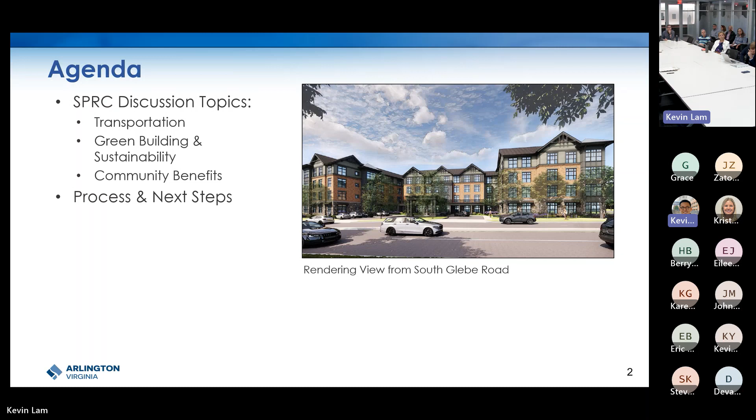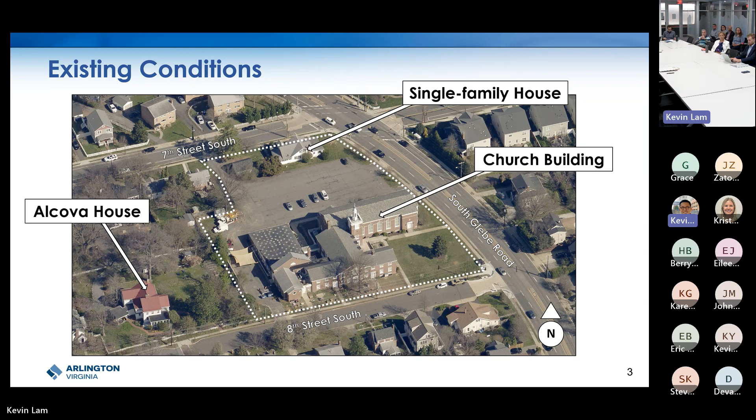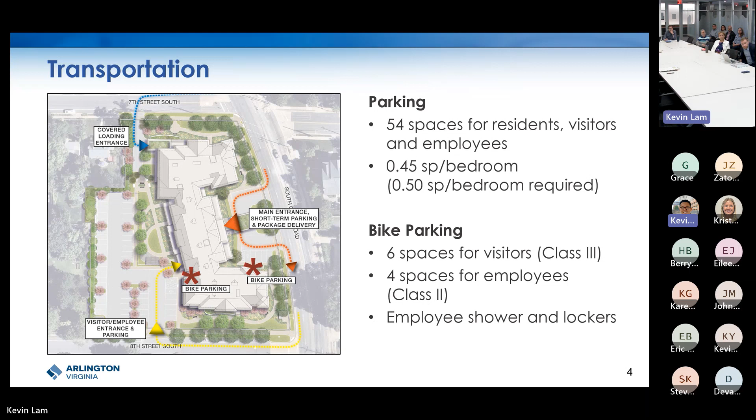In terms of parking, the applicant will be providing 54 spaces, serving residents, visitors, and employees. This works out to a parking ratio of 0.45 spaces per bedroom, and the applicant is requesting a reduced parking ratio since the zoning ordinance requirement is 0.5 spaces per bedroom. In terms of bike parking, the applicant is providing 6 spaces for visitors in the form of a bike rack by the front, and 4 spaces in covered bike racks for employees in the rear. The facility will also include an employee shower facility as well as lockers.

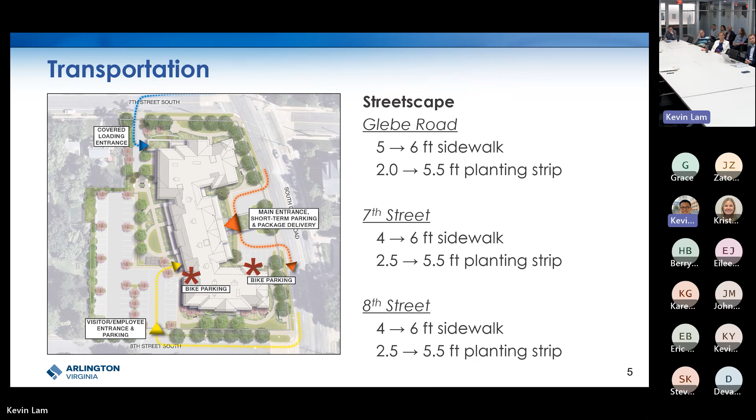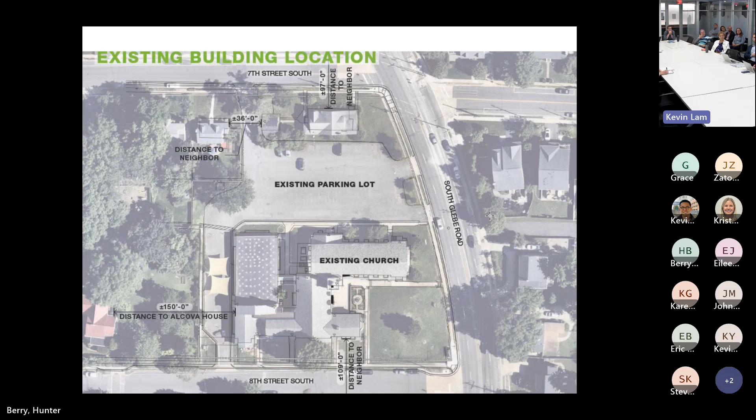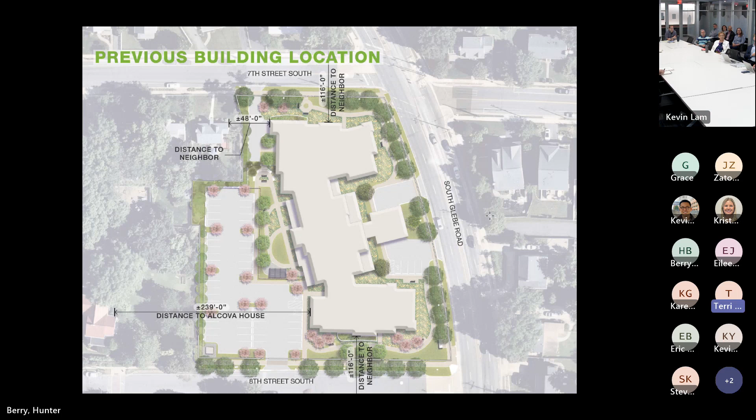Here we have what was our former siting of the building on the site, and this is our update. It's going to be hard to tell unless you come look at my screen, but we shifted the building 7 feet to the east, closer to Glebe Road. This was done in response to requests from staff, and it allows the building to better hold the street line with Glebe Road for a more urban condition.

By doing that, we were able to move our building further away from our neighbors. We were also able to shrink the front drop-off area to reduce some of the asphalt there. And again, per staff request, we took a detailed look at the porte cochere and shrunk the design to make it more urban and less suburban looking and feeling, which we'll have more images of later.

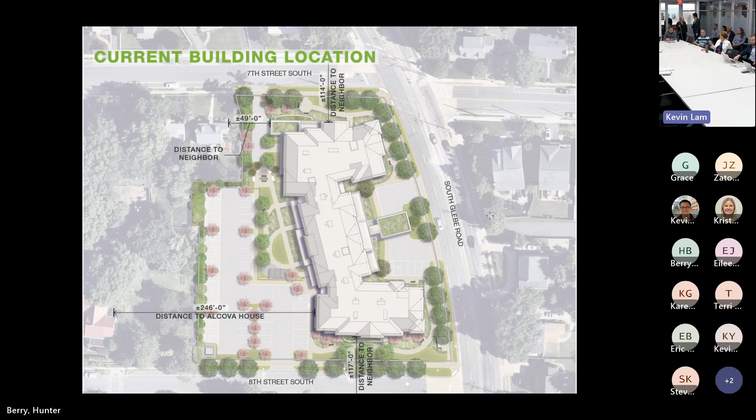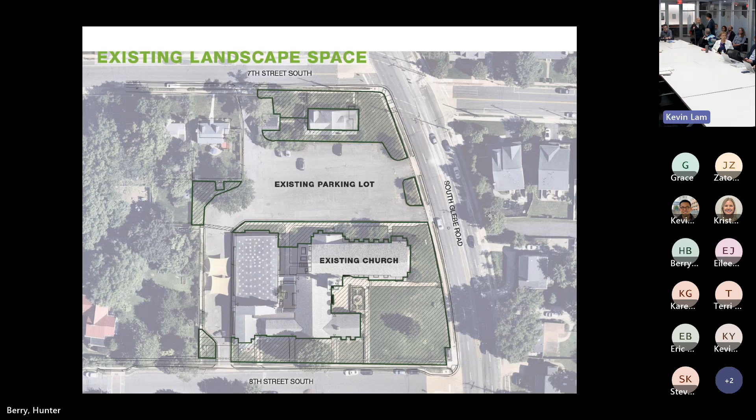First, we've shifted the building, as I mentioned, 7 feet to the east. This allowed us to introduce even further biophilic and native plantings to the site. It also allowed us to increase the rear courtyard—the SPRC had requested we look at expanding it—so now that space has grown by over 800 square feet.

We're also able to, by shifting the building, introduce further planting strips within the parking lot, so now we have an additional row of trees there. We're actually able to further expand the landscaping on the western edge of the property that fronts our neighbors, including the Alcova House. We were able to add, per SPRC request, two areas of green roof, on the porte cochere and on the loading dock in the rear.

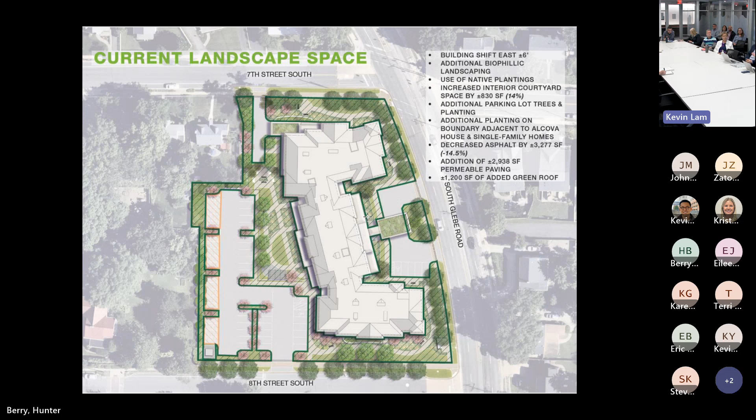Finally, we were able to further decrease asphalt by over 3,000 square feet, in two ways. One, by shifting the building east, we shrank the driveway in front very slightly. The other was introducing permeable pavers, which I'd like to get into more detail on in a second.

This is that same landscape plan without the hatching. I wanted to show how green and vibrant the landscaping on site is going to be, and I also want to point out the permeable pavers—an important thing to note. It was a request from SPRC; we took it back and studied it diligently. The challenge is there are a lot of conflicts because of utilities running through the site where you can't have permeable pavers. What we found is this entire strip of parking on the west side, we are able to have permeable pavers. So we went from having none before to 3,000 square feet of pavers moving forward, which we're thrilled about.

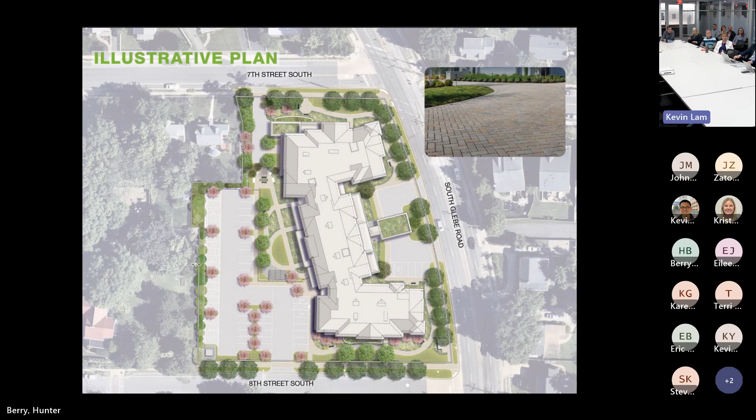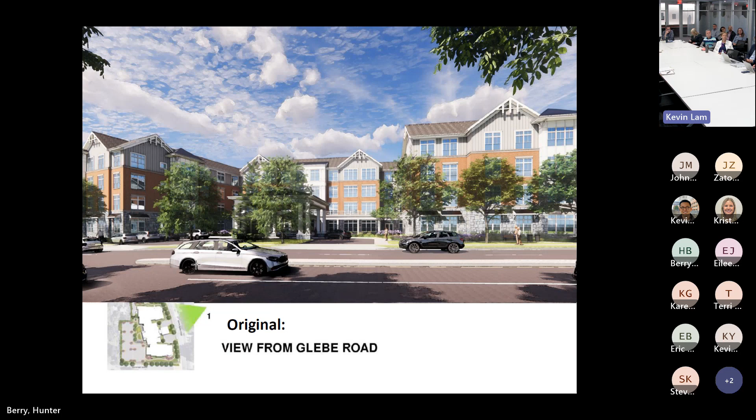So moving on to some of the architectural views of the site. This is the original view, the view we showed last time at SPRC from Glebe Road.

And this is our new view today. The first thing I'll point out is the porte cochere, as I mentioned. We worked to shrink the overall size of this. We also flattened the roof, and that allowed us to have the green roof there.

We also made a number of updates to the design, driven by two factors: one, to be more reflective of the neighborhood design, and also the arts and crafts style. So we worked with the color palette to introduce a richer color palette that we think is more reflective of the neighborhood. In addition, at the top here, we had vertical siding before, and now we've introduced architectural shingles.

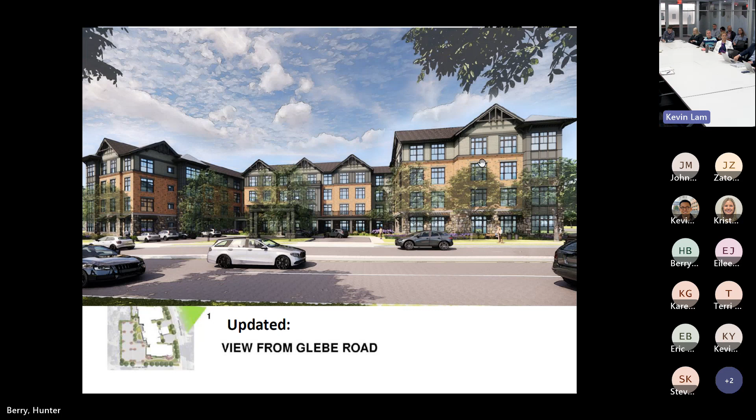This is the view of 7th and Glebe. This was the previous view, and this is our new view today. So just a couple things to point out. First, hopefully you felt the presence a little bit - we're definitely holding that street wall more, which we think is a really nice feature. In addition, we've upgraded the stone at the base of the building to be more reflective of what we've found in the actual neighborhood.

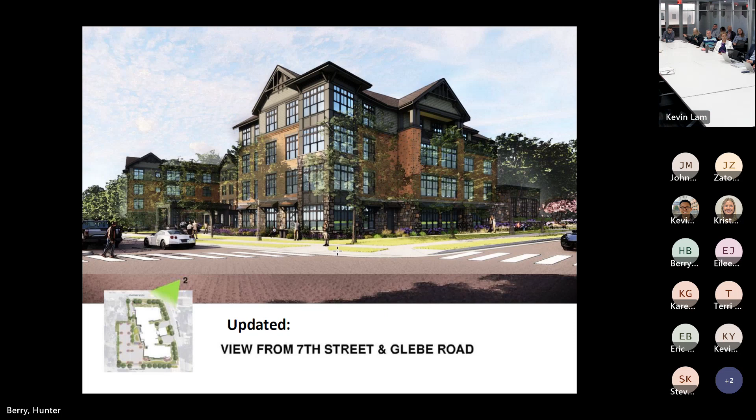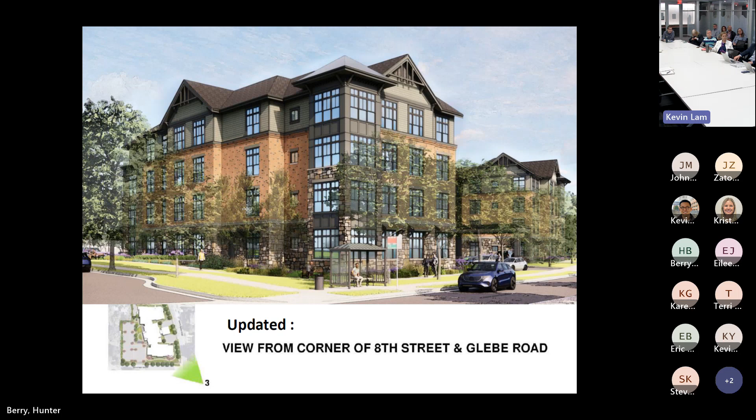Here's a view from 8th and Glebe, and here's our updated view. A couple things to point out: before we had a monolithic brick design, and now we have a blended brick design that we think is a much nicer feature. In addition, per a request from SPRC, where available, we've shrunk windows. This is a good opportunity to show you on the left side here - you can see some of the windows. We've been able to reduce the size as we have in other places. It's just a good example.

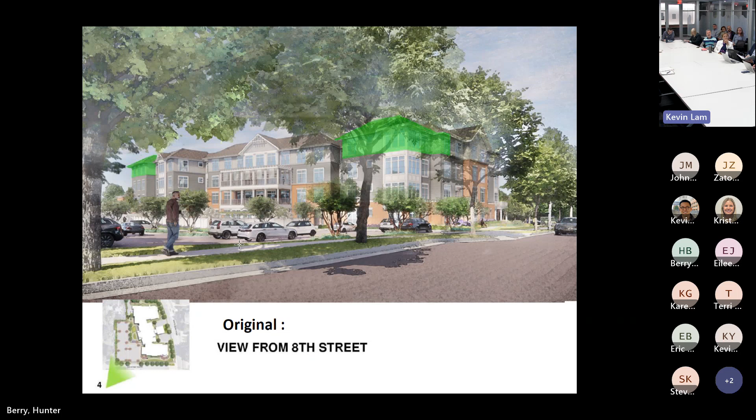And then finally, the view of the rear of the building. We showed this at the last SPRC. We said we were committed to further reducing the massing in the rear closest to our residential neighbors - that's highlighted in green. And here's that new view today. I think the easiest place to see it is on the left side here - this is the north wing, we've reduced the massing there. It's a little tougher to see here because of the tree, but the massing has also been reduced on this corner of the building as well.

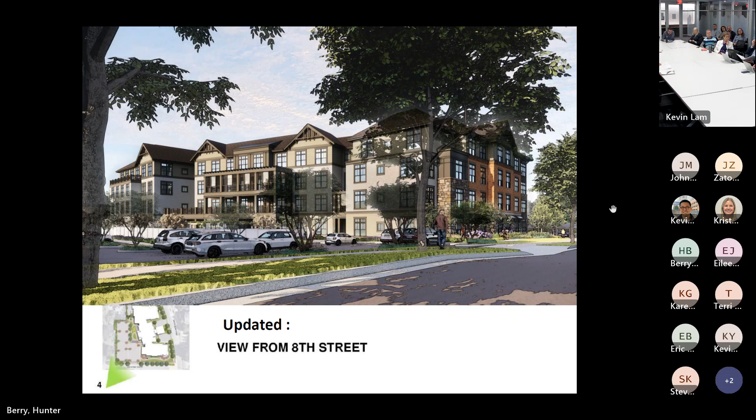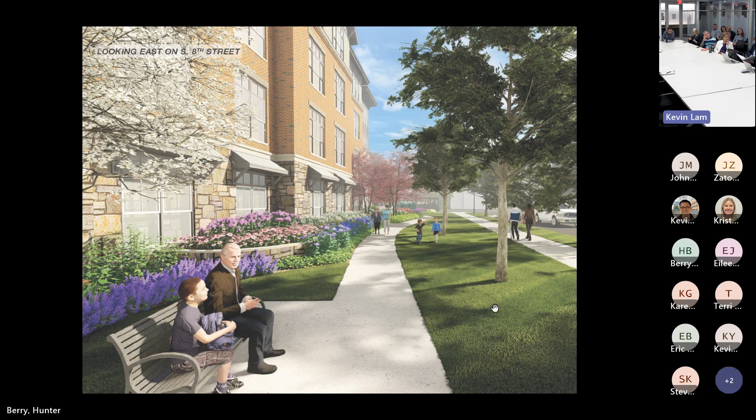And finally, we had a number of questions about landscaping, how it's really going to look and feel on the site. So we have a number of images around the site I'd love to share with everyone. This is if you're standing on 8th Street looking east towards Glebe Road, just highlighting the absolute beautiful landscaping all along the building, lots of green area, and on this side of the project, street trees both outbound and inbound to the sidewalk.

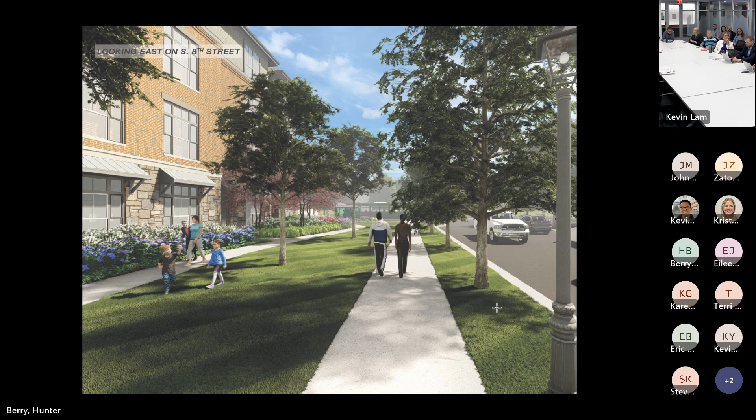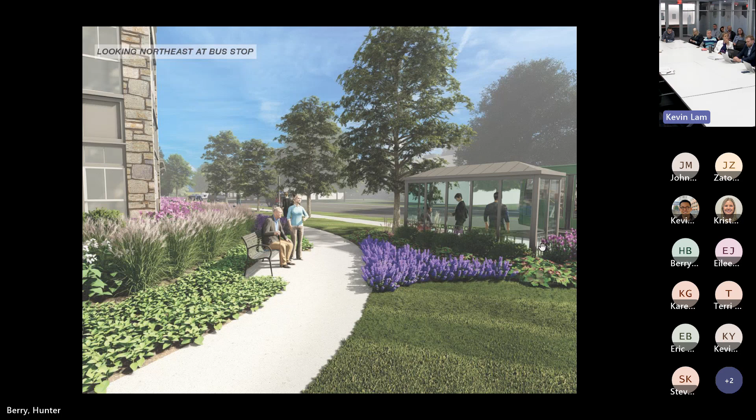Here's another one of those images on 8th Street looking towards Glebe Road. Here we have the corner of 8th and Glebe - again, a request from SPRC to study the bus stop and how we can enhance the landscaping there. So we've really focused on enhancing the landscaping all around the bus stop. Here's another view of that.

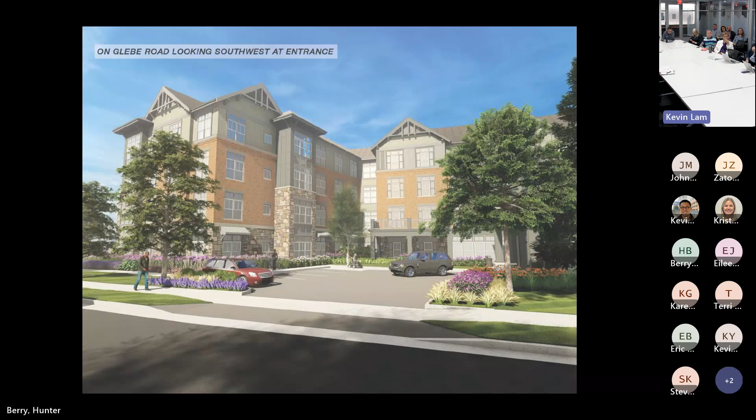We do want to highlight this. Staff had a number of questions and requests about our small parking area here. It's important for our operations to have a couple limited temporary spaces - it's really just for short-term drop-off and pickup. Obviously, it's a very small parking lot. It'll be very well landscaped from the street, as you can see here.

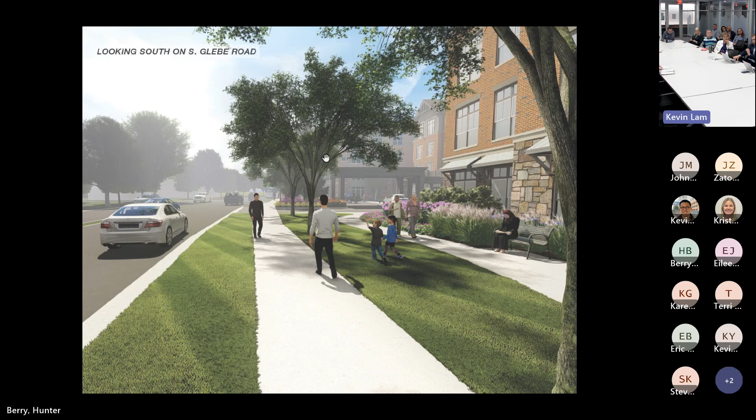This is a view of Glebe Road looking south. I'll point out again the porte cochere with the flat roof, so we can have the green roof here. Obviously, street trees - I'll get into this in more detail, but there are a number of issues with utility conflicts, so the street trees here will actually be inbound to the sidewalk.

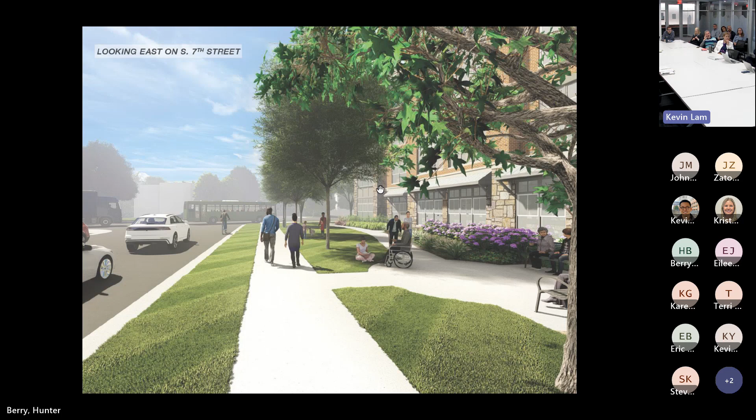And then this is a view of 7th Street looking east. Again, street trees inbound, but still street trees all along the frontage, as well as wonderful landscaping along the edge of the building. And then finally, in terms of new views, I'll just pause for a second so everyone can reorient themselves. We had a number of questions about what our rear garden was going to look and feel like, so we produced a number of images.

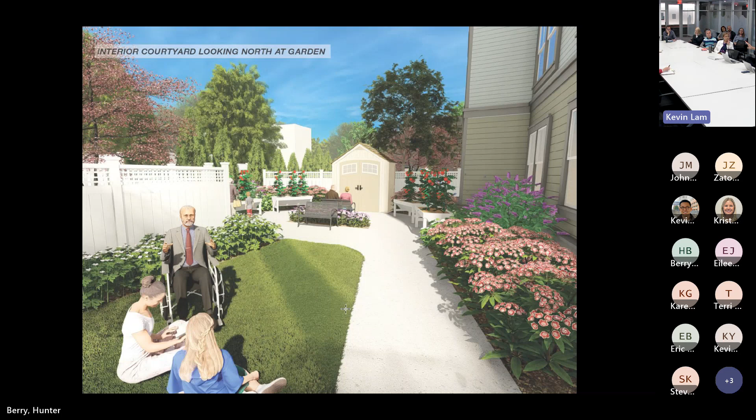This is the view if you've moved a little further north in that space. Now you're looking at the northern end. As of right now, we are programming this space as our garden center. One of our most popular clubs for residents is typically our garden club. Residents absolutely love the garden, especially in an environment like Northern Virginia. So we'll have that planned here.

That's my hopefully quick catch-up from last time, now into new topics.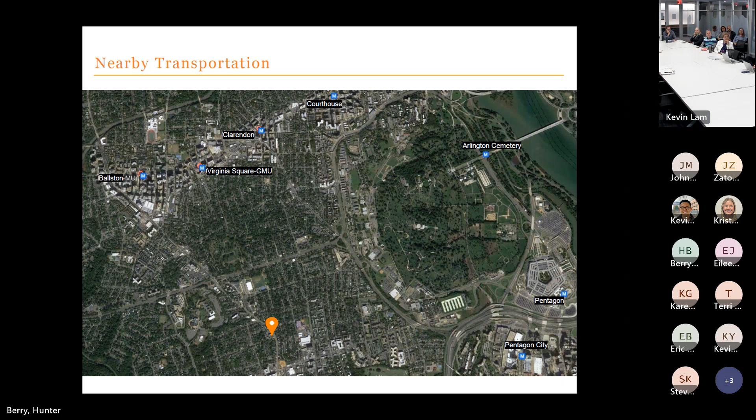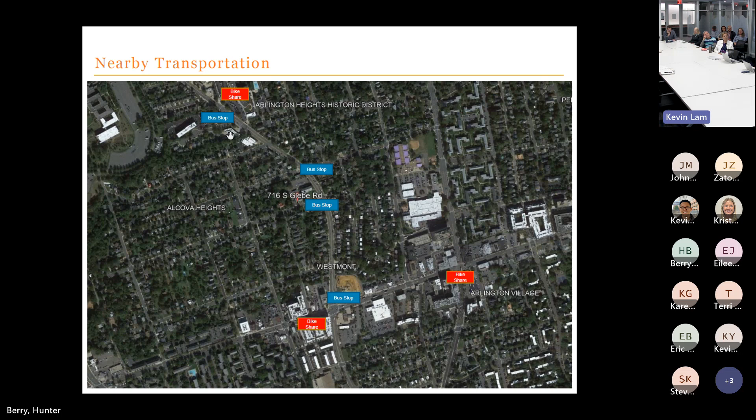This is a little more zoomed in, with our site right in the middle of the page. The bus network in this area is wonderful—there's a bus stop literally in front of the building, along with a number of bus stops up and down Glebe Road and along Columbia Pike. In addition, there are several bike share stations around the site. We find that the site is extremely well connected by sidewalks, roadways, bus lines, metro, and bicycle facilities.

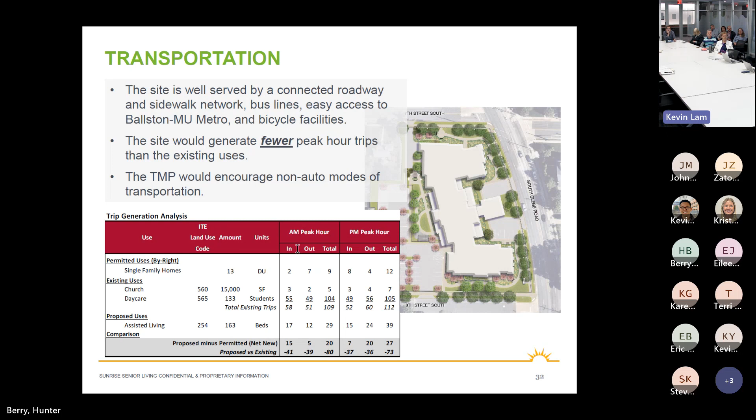We've also studied the amount of vehicular trips that will be generated here. What we found is our project will actually reduce the number of vehicular trips compared to what's there today with the church and daycare use.

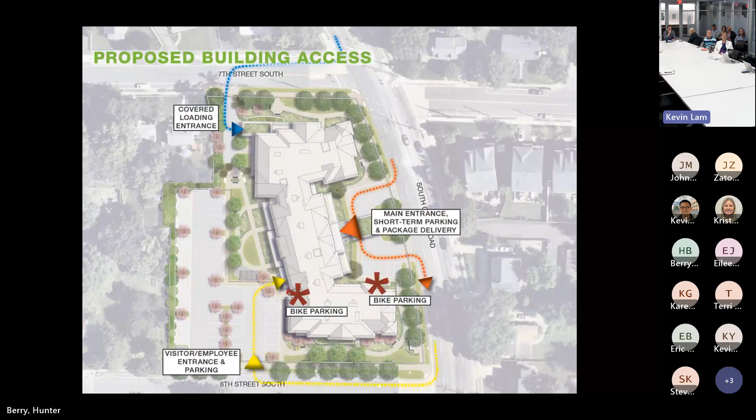In addition, Kevin mentioned we will be providing bike parking—3 bike racks in the front, 2 in the rear for visitors and employees. We also provide both locker rooms and shower facilities for our employees.

A couple other items on transportation: at the corner of 7th and Glebe, we will be providing new curb ramps and new pedestrian push buttons. We'll also provide an easement for future traffic control equipment. And at 8th and Glebe, there will be new curb ramps as well as new striping done by Sunrise for that intersection.

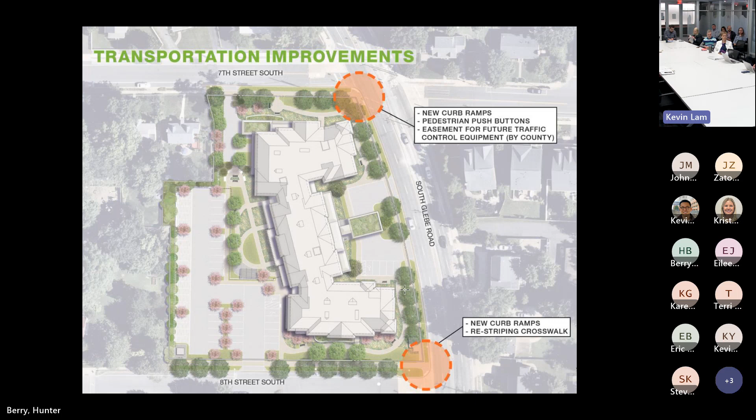Wanted to touch on the pedestrian experience, in particular on Glebe Road. To be honest, the experience there today is not a wonderful one. There's an existing retaining wall, no street trees, and the sidewalk is only 5 feet wide with just 1.5 feet off the curb. It's really not a great experience today.

However, we think we are going to vastly improve the experience. On Glebe Road, that retaining wall will be removed and we will be installing a landscape buffer. You'll be fully 5.5 feet set back from the curb, and the sidewalk will be expanded from 5 to 6 feet on Glebe. On 7th and 8th, where there are 4-foot sidewalks, those will be expanded to 6 feet.

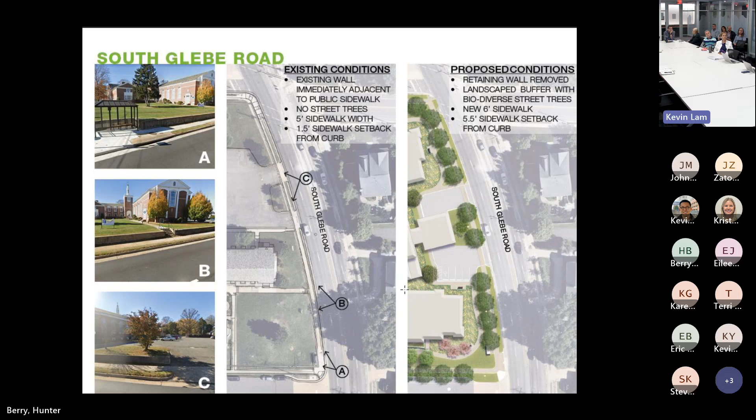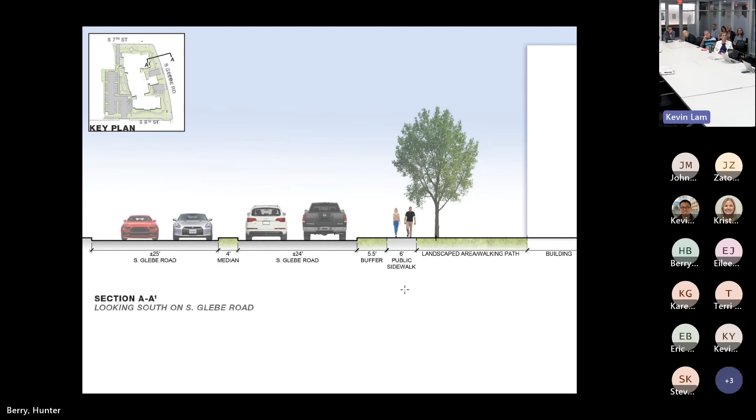Just a couple of sections here. This is Glebe Road looking south—the white on the right is the building. There'll be a landscaped area of street trees, a 6-foot sidewalk, and a 5.5-foot buffer.

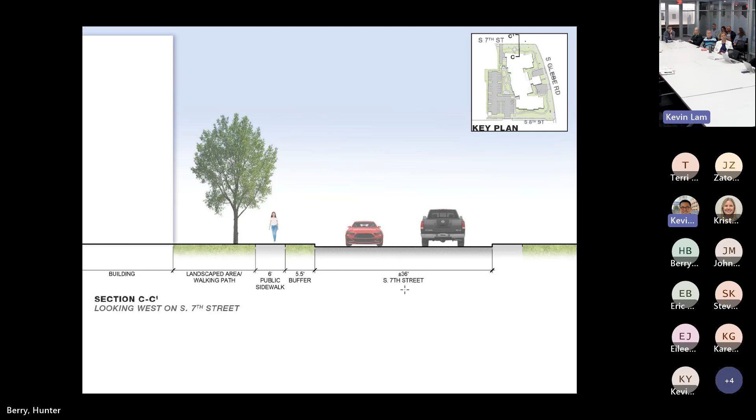At the last SPRC, we had a number of questions about how it would look and feel looking west towards our residential neighbors, in particular the Alcova House. So this is that view from within the parking lot, with the Alcova House in the rear. There will be tree islands with plantings and trees within the parking lot, a small knee wall, and then very robust plantings and trees, and beyond that, the neighbor's fence and their trees. So there'll be quite a lot of buffer between our parking lot and the neighbor.

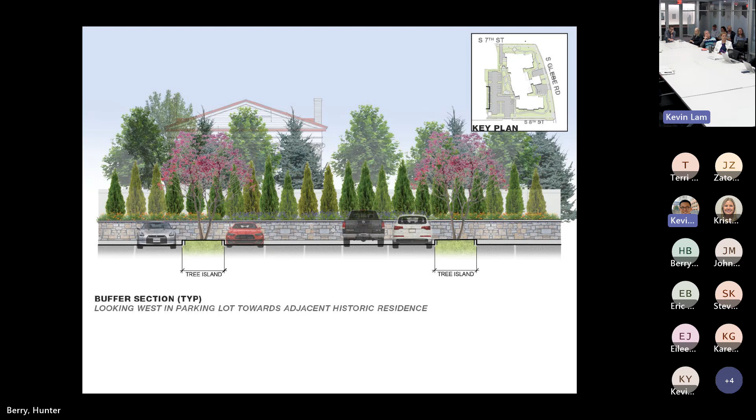To touch on sustainability quickly, I'm proud to say that after a tremendous amount of work from our team, we will be able to hit LEED Silver for the project. That includes optimizing our energy performance, making sure we're hitting at least 20% savings, hopefully a little bit more. We'll also be hitting a number of the Arlington Community Priority credits, including envelope commissioning, as well as light pollution reduction.

Finally, at our last SPRC, there were a number of questions about using bird-friendly materials. So this is something our team took back and studied quite intently. What we found is that the use of UV coatings for what they call bird glass is typically used for storefront or curtain wall systems—imagine a glass skyscraper in Arlington or a residential high-rise that's all glass. They typically make glass they call bird glass.

For our projects, for Sunrise, we really prefer a residential look and feel for our windows. It's typically not something that's readily available in terms of having what they call bird glass, so it's not something we've been able to easily find. So we've been looking at what other options we could use.

The second option we looked at is whether we have fritting on our glass. Unfortunately, what we found is that fritting can be very confusing for seniors, especially those with dementia. It can also reduce the amount of light and views that come into the units. So we said, okay, what is an option that can work and still be bird friendly?

What we found is that insect screens are actually an excellent bird deterrent, and we provide insect screens on all of our windows. So it actually provides better bird-friendly protection than even bird glass or fritting. We're very confident this will be a bird-friendly project. I actually met with our head of facilities, who helps manage our 300 Sunrises across North America, and he said there wasn't a single reportable incident of a bird impact at any of our buildings that he was aware of in the 20 years he's worked here. So we're very confident that with our design, our residential windows, and our screens, it'll be very bird-friendly.

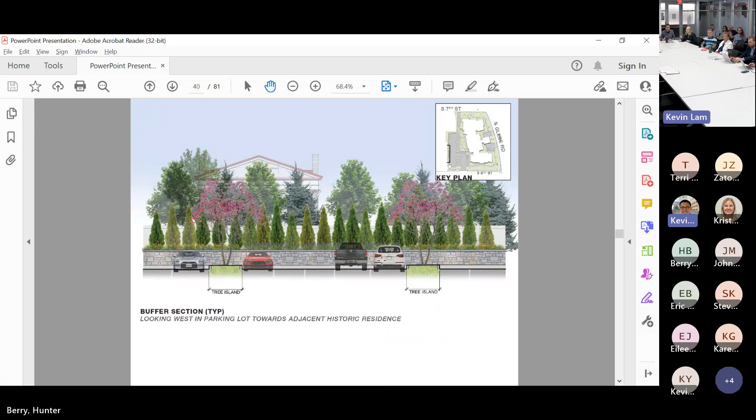There's a good view from the garden, I think. So what you're seeing here on the third floor is actually a balcony space for our residents with dementia. There's a secured floor for them on the third floor. Of course, we want to have outdoor space for them as well, so that's what this space is here. This is just a covered patio below them.

Is that new? No, I think we had it before. It's just maybe more apparent now.

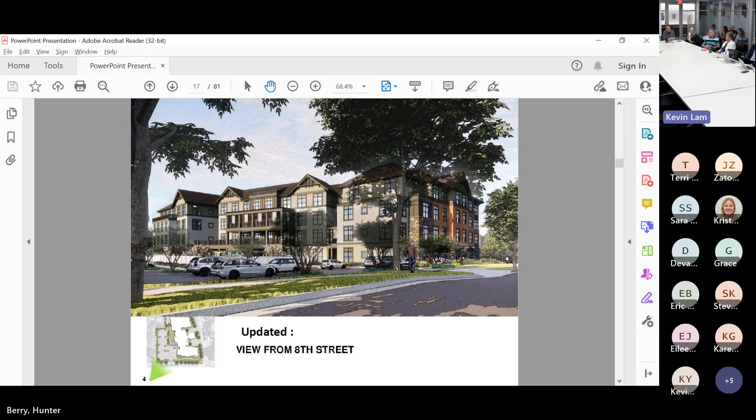How do people, if you end up in the end of the parking lot, how do you get back out? Is there room to do that easily? Yes, so there's really only 2 drive aisles in the parking lot. So let's say you're going south down Glebe, you make a right turn, you pull into the parking lot. You're either going to park in this first row, or you pull here and park in this row or park in the rear. So the furthest you'd go is pull into the rear and park, and then come out this way. But there's plenty of room to back up.

Yes, absolutely. And you provide a van for—We do. The van parks somewhere too? Is it one van, yes, 2 vans, 3 vans? It's one van that fits into a normal parking spot. And at some point you'll tell us what you do with the van. Yes, I could tell you right now if you'd like. No, we'll go on to other things, but I'm glad you have that.

Okay, and for the loading dock, what types of vehicles normally load and unload there? You're not going to have moving vans and stuff, you don't expect really large trucks, garbage trucks? Yeah, garbage trucks and delivery trucks for food and supplies to the building. Nothing that's 50 feet long. No, but we've also sized it to fit the largest trucks we'd expect. And there's plenty of room there for these drivers to easily turn around? Yeah, we have the best civil engineers in the business here, and they've planned it all out for us.

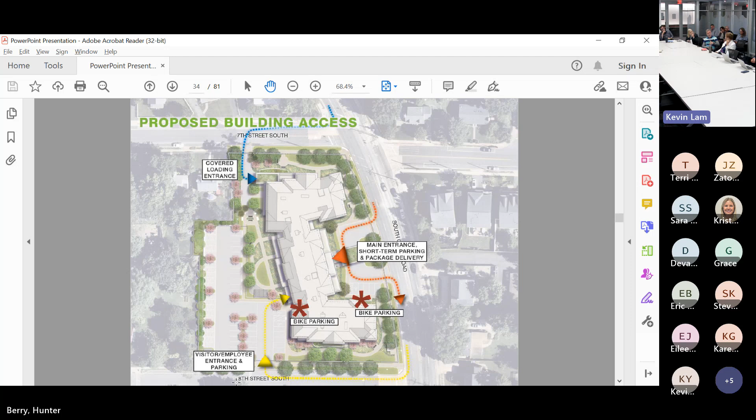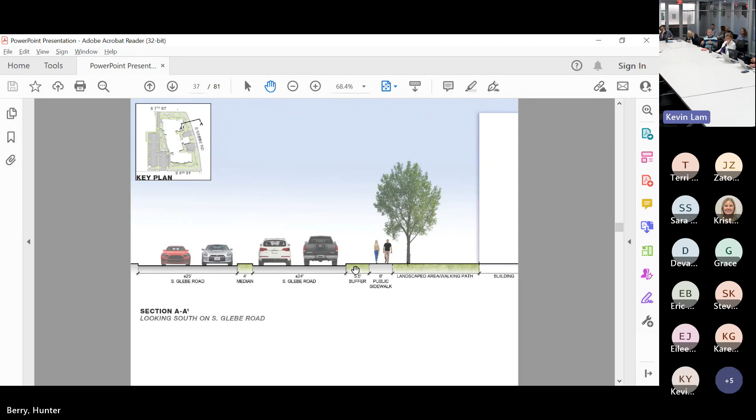A question about the sidewalks and the strip between the curb and the sidewalk. Since the sidewalk is being widened and shifted to add the green strip, is that area now public right of way, or will it remain private property as a public easement?

Travis answered that the majority of the grass strip and sidewalk will be in the right of way, but a portion of the sidewalk will be in a public access sidewalk easement. If it's not in the right of way, there will be an easement over it. The property line isn't a straight line; it's really weird in the county, sometimes private property goes into the middle of the street.

On parking, I definitely support dropping the required percentage, that makes perfect sense to me. I'd love it if, in the future, when it's clear the lot isn't being used that much and there are a lot of extra spaces, those could be converted to green space, open space, landscape space, or amenity space for residents, so we're not left with even more asphalt. It's great how you shrunk the asphalt, shrank the porte cochere area, and added more green in the back. That was definitely the direction we all wanted to go, so kudos. But going forward in the decades to come, if it turns out you don't need those spaces, seriously consider pulling that up and turning it into green space.

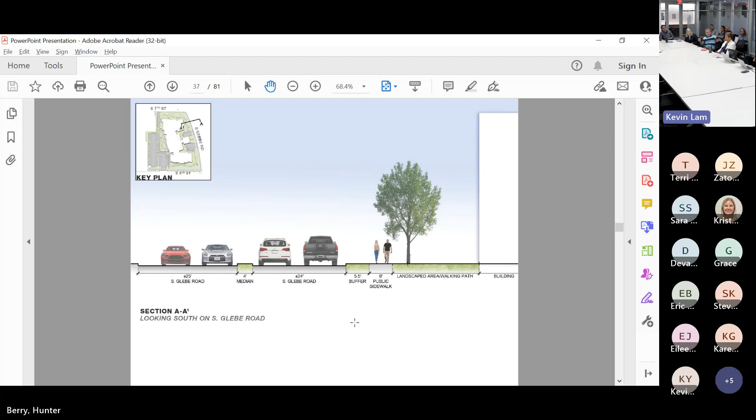There's one bus stop right in front. Where's the bus stop for the other direction? By the 7-Eleven. There's a traffic light at that corner, though it's a pretty long diagonal crossing. Both bus shelters are great, they're big, with a double bench and wide space, so we're in really good shape there, no problems at all as far as I looked at them. Okay, great, that's what I wanted to hear.

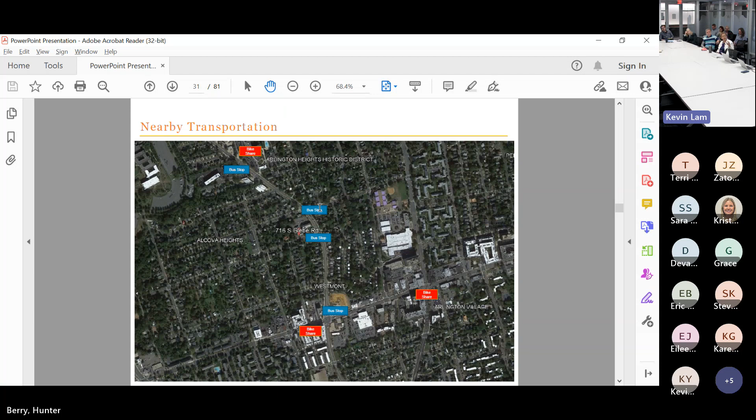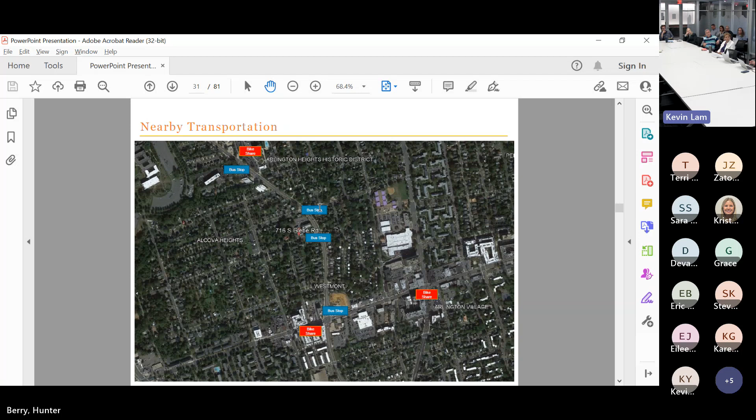Nia asked where the handicap spaces are. There is one directly in the front and two at the rear entrance, so visitors can come in that way.

Nia asked if three is enough for this type of facility, since even visitors often arrive in handicapped vehicles because they're friends or family. The response was that this has been studied at Sunrise, and three is usually enough because the other option is the porte-cochere, where family members typically drop residents off right at the front without needing to use the handicap spaces. If they're always filled, the facility could redistribute or restrict use, and people can easily enter from either the front or rear entrance.

Thank you. I'm going to go online now for Commissioner Eric, and then you, Doris.

Just a quick question about the porte-cochere. Is there any calming measure, like a speed bump, to prevent folks from whipping in and out? Some of our newer developments along the pike have utilized this. I'm thinking about our enhanced pedestrian experience—I really appreciate the wide sidewalks and distance from the curb and other things the applicant has done here. Is that something being considered, or could be considered?

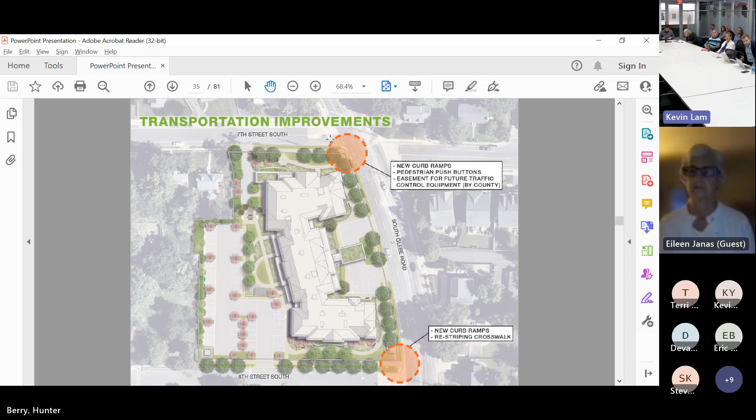Hi, I'm Eileen Janas, I live in Arlington Heights. Just verifying that you can hear me okay? Yes. Okay, just a couple of comments. For Sunrise, I like your new illustrations, but it looked to me like the shingles were really dark. And as far as I know, Energy Star shingles are much lighter, so I hope the intention is to have Energy Star shingles on the building, and it's just that the illustrations are colorful and decorative, but not accurate.

My second comment is for the county, and it's about the street divider. If I'm coming from Columbia Pike and I want to drop somebody off, I do not want to make a U-turn on 7th Street. And if I've met somebody coming out from the porte-cochere and I want to go towards Route 50, I don't want to have to turn right and make a U-turn at 7th Street. It seems to me there are good lines of sight there so that you could make both a left and a right coming out of the building safely, which is much better than U-turns. So I hope you will reconsider having the divider prevent people from getting across the street.